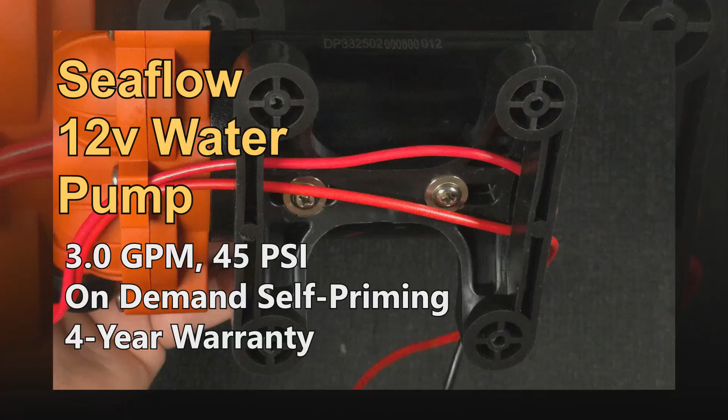So again, we're looking at the SEAFLO series, 33 series. It's an automatic demand diaphragm pump, which means when you lift the lever on your faucet, it releases the pressure in the line, causing the pump to realize water is being requested, so it activates. And when you close it, that creates pressure in the pipeline which triggers the pump to turn itself off.

Make water work for you. We've got corrosion resistant valves. You've got quiet running, that's important, and corrosion resistant valves, also important. Smooth operation - we'll have to compare and contrast with others.

Self priming, another important thing, because sometimes you need to refill your water supply and it goes dry. And speaking of running dry, when your water goes out, you need to be able to run dry for a minute and not freak itself out or damage the actual pump itself. It needs to be able to do that because that's part of the lay of the ground when you're using these types of pumps on the road in an RV or other capacity.

Got low power draw - well, we'll see about that. Easy connection system, and then a Santoprene diaphragm. Of course, these are operational in boats, RVs, and other water applications.

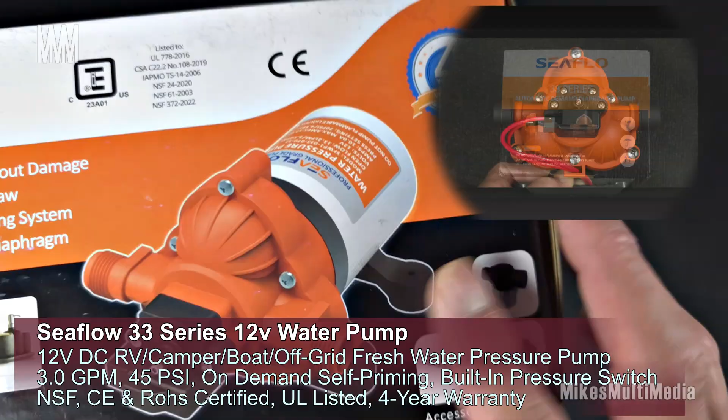There's a slight picture of it. Some of the components and accessories are included. Indicates it's got a 4-year warranty. On the bottom, you got some diagrammatic information which includes inches, which is great.

So you can take a quick look at that for dimensional requirements. And here's another angle of the dimensional information. Over here is a chart. This one is number 1-30-45-33, the first one on the column there if you want to follow along.

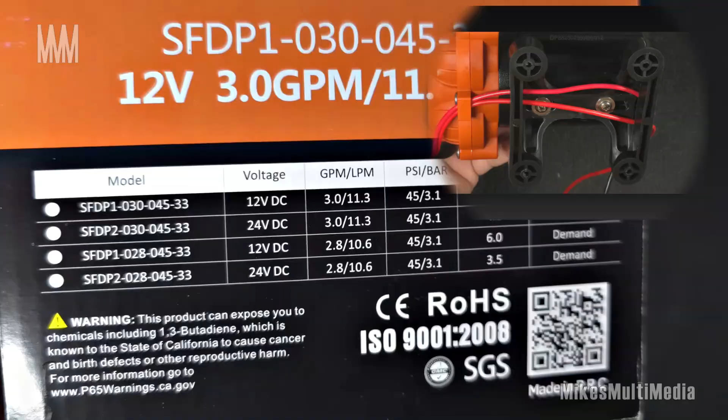You got the model number, voltage 12 volt DC. You have the gallons per minute, which is 3, or liters per minute on the right there, 11.3. PSI and bar, pounds per square inch, is 45. Got a max draw of 8 amps. Switch is on demand. So there's your little chart for that.

So we got a SEAFLO here, 33. Let's take a look at what's in the box.

If you're ordering this on Amazon, make sure you have them put it in another box to hide what's inside, because I had to peel off their shipping label that's on here, and it's all sticky right now. Some of your orders you will not have that option, so be prepared. I usually take that sticker right off just to have a clean box.

So we just opened the box. We took out some of the literature that's in there. SEAFLO, blah blah blah blah.

Register your SEAFLO for a 4-year product warranty. Register your product within 120 days of purchase to guarantee 4-year warranty from date of purchase. For warranty claims, visit SEAFLOUSA.com. This 4-year benchmark for how many years it's warranted should be just about right.

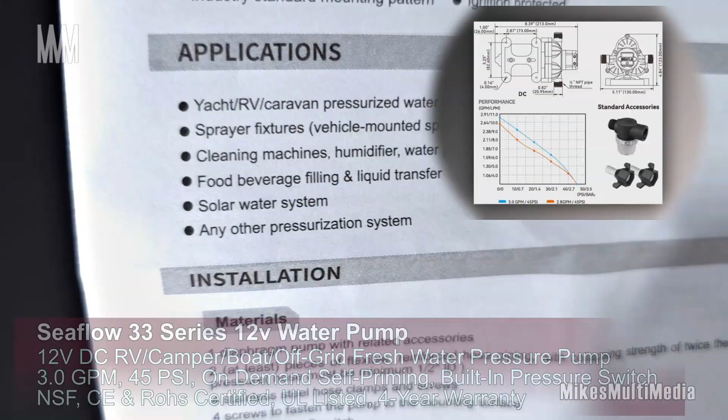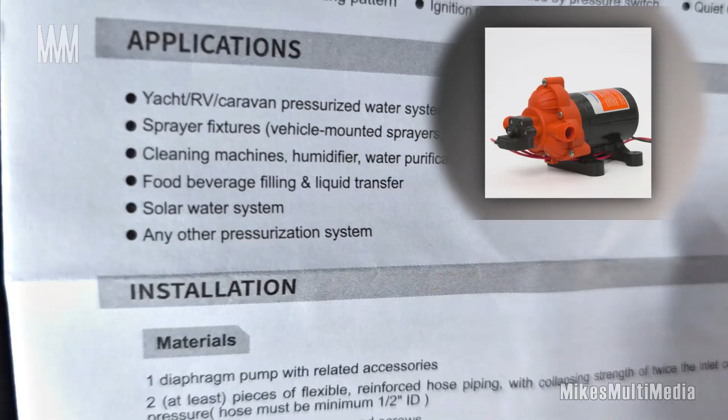Diagram, pump manual, 33 series. Applications: sprayer fixtures, cleaning machines, humidifiers, food and beverage filling, liquid transfers, solar water systems, any other pressurized system. Materials: stainless steel, hose clamps, and so on and so forth.

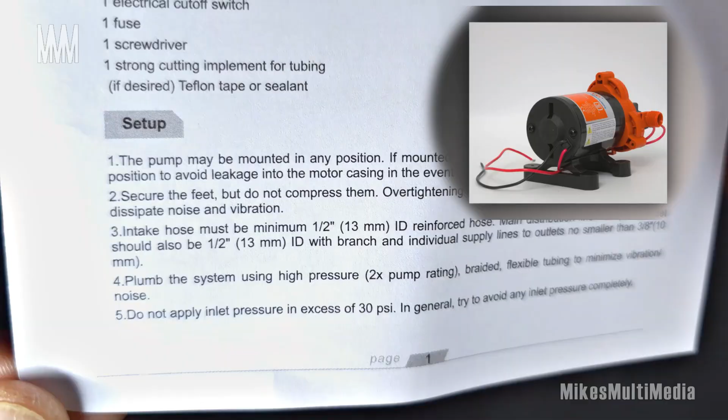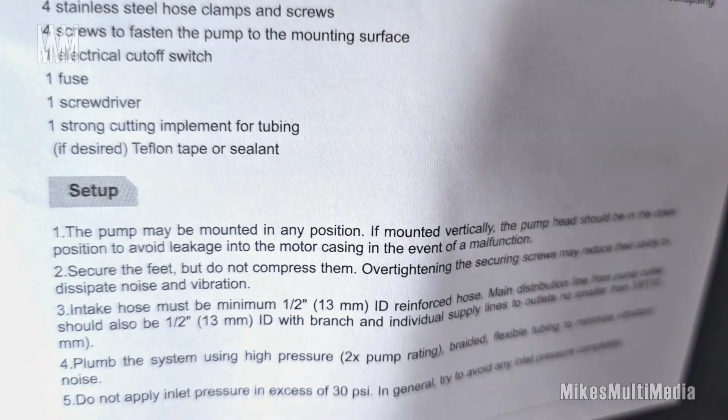Setup procedures: the pump may be mounted in any position. If mounted vertically, the pump head should be in the down position to avoid leakage into the motor casing in the event of a malfunction. Secure the feet, but do not compress them.

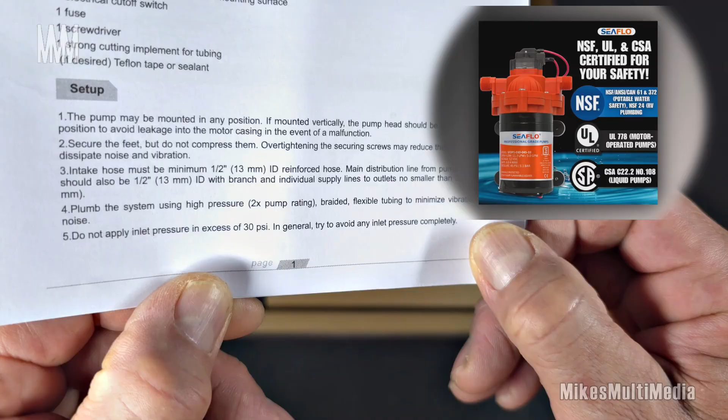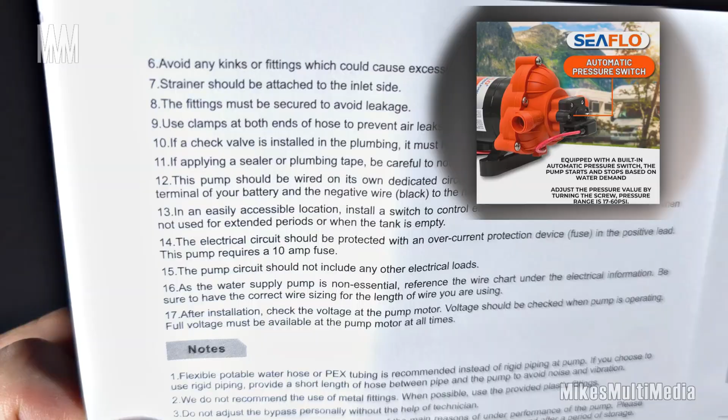Intake hose must be minimum of 1/2 inch. The intake main distribution line from pump outlet should be 1/2 inch. Do not apply inlet pressure in excess of 30 psi. In general, try to avoid any inlet pressure completely. Avoid any kinks. Strainer should be attached. The fittings must be secured.

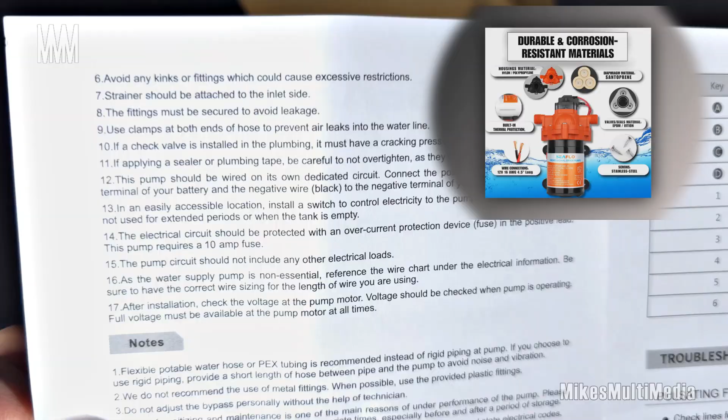Use clamps at both ends. If a check valve is installed, this pump should be wired on its own dedicated circuit. The electrical circuit should be protected. The pump circuit should not include any other electrical loads. After installation, check the voltage on the pump.

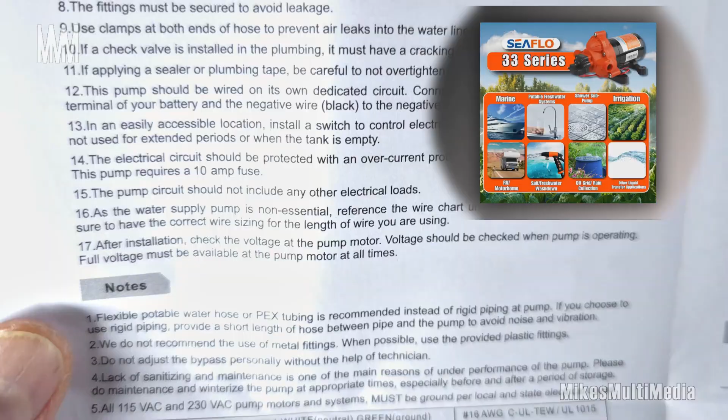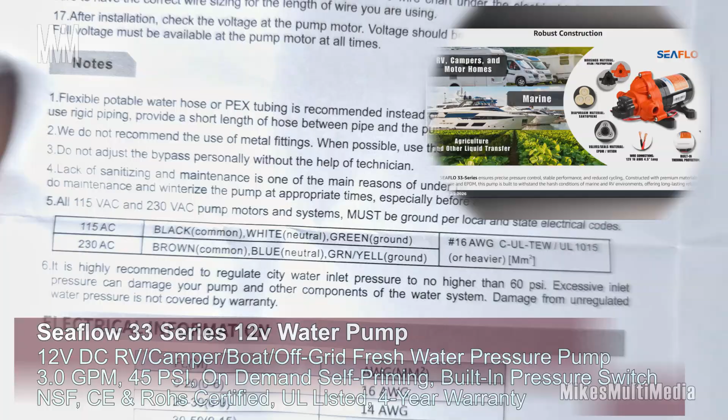We do not recommend the use of metal fittings. When possible, use provided plastic fittings. Do not adjust the bypass personally without help from a technician. Lack of sanitation and maintenance is one of the main reasons of underperformance of the pump. Please do maintenance and winterize the pump. All 115 pump motors and systems must be grounded per local and state electrical codes.

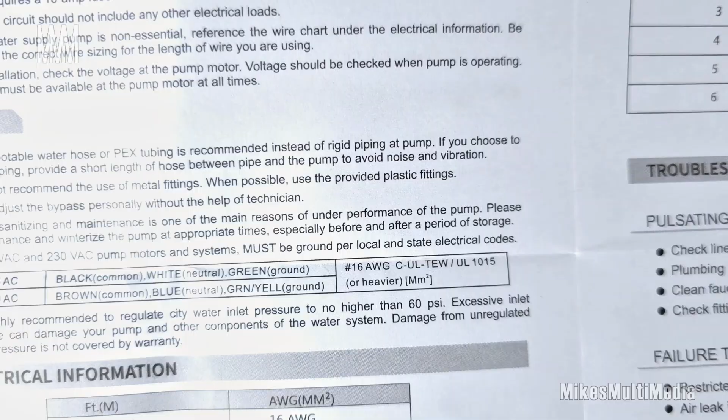You know, that was rather informative. I know you're probably rolling your eyes on that, but at least we walked through it together.

See now the fun part, opening the box and checking out what's going on in here. So we take that out. Here are some of the accessories and connectors. I like this connecting screw-on kind of fixture method that they got going on here.

Whoa, wow, this has got some weight to it. Not a whole lot, just a standard looking build. Wow, the whole bottom here is rubber. This whole mount is rubber. Interesting, some of them could do plastic and only do rubber on the feet. This whole thing, all the way up to the attaching point, is rubber.

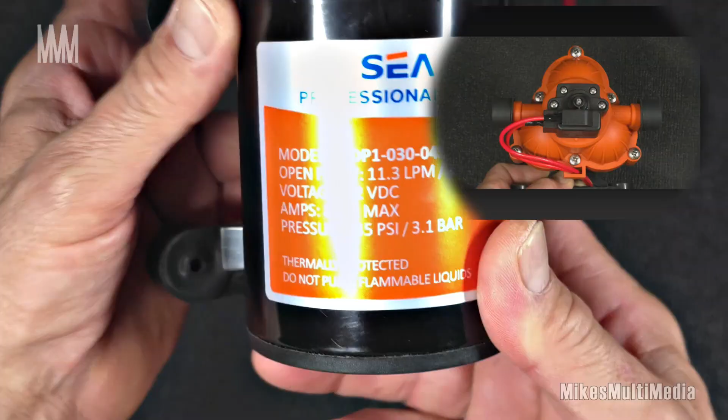So let's take a closer look at the pump. As I mentioned earlier, it's got a full rubber base. This feet, and this mount, is all rubber. You can see all the way through up until its mounting screws, which is probably going to answer the question on why this thing would be so quiet, according to some of the information we've already heard with some of the reviews. Here's the same model number.

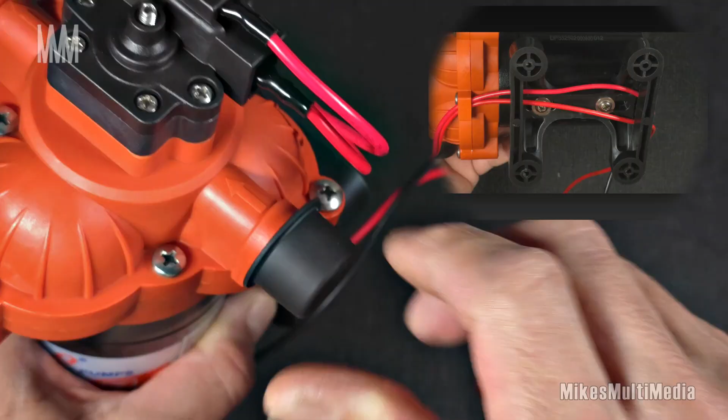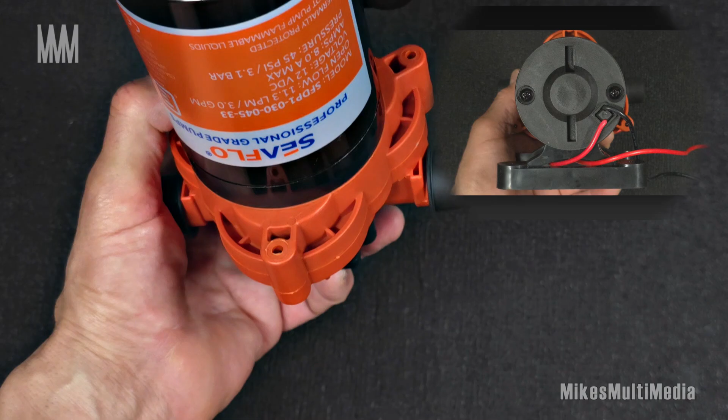All right, here are your two in and out ports here. You've got arrows indicating the directionality of it. In, out. According to the instructions, mount it with the head down in case it leaks, so it doesn't go up into the motor and your electronics, which are up here as well. Black and red cabling, pre-spliced, awesome, with a 1/2 inch fitting.

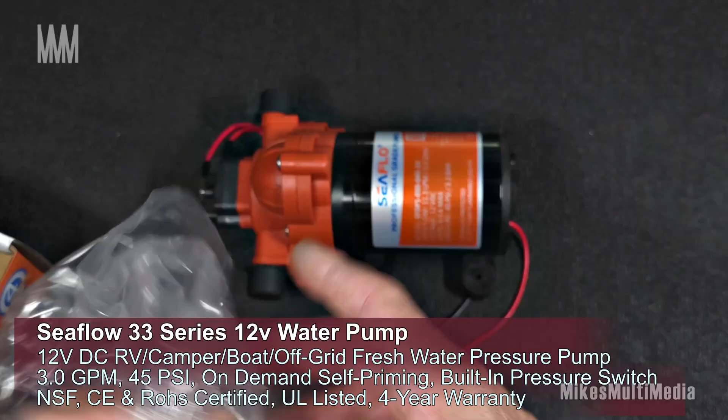Screws in front, nice, clean build, nothing kind of wiggy. 1, 2, 3, 4, 5, 6 screws, Phillips, in case you need to get up in there. Identification number there, not bad. 2 screws in the back for other maintenance or accessing the motor components. So generally, I am impressed so far with the build quality and the simplicity of the packaging of this particular pump. And it's a 33 series.

So we're just going to tuck it away until we're actually going to be putting it in for installation. Looking forward to this, and we'll just move the working one into a backup capacity. Still keeping it on board because you never know when these things are going to fail. You can have an extra part laying around for emergency purposes. But this one, we look forward to seeing how it works on its own. When I get it installed, of course I'll go ahead and record that and share it with y'all. So until next time, SEAFLO 33 series automatic demand diaphragm pump.